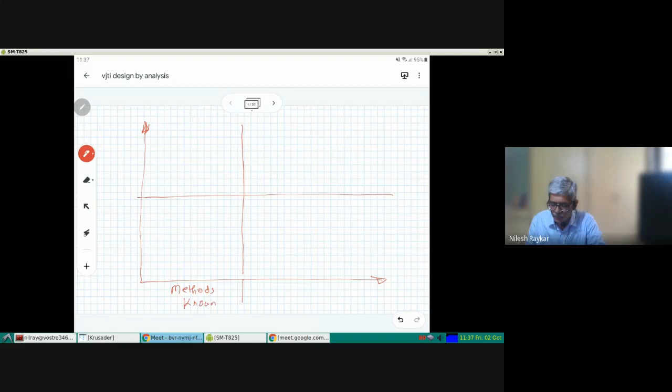So the problems which are there in product design, you can divide into 4 quadrants. Those who have done some work in design thinking would know this particular diagram. On the horizontal axis, there are some problems for which the methods to solve them are known. So methods are known.

And there are some problems in product design where the methods are unknown. We don't know exactly how to design that particular case. On the vertical axis is the customer need, or the output that you are expecting. In the first part, the customer needs are clear. And on the upper part, the customer needs are unclear, so you are not very clear as to what exactly the customer wants or what exactly is expected out of your product.

80% of the problems falls in the quadrant which I will call quadrant 1. This 80% of the problems fall in this realm where the methods are well established, there are design codes, design standards, and the needs are clear. You want the equipment to survive for 20 years. So 80% of the problems will be part of this situation.

There are situations which I'm calling realm 2. In this particular realm, the methods are not known. The codes and standards give you design methods, but these methods have got limitations. So in this case, you resort to what is known as simulation.

So you simulate the problem situation, the environment in which your product is going to work. In this case, I'm talking about pressure vessels - what kind of loading they are going to face. You'll try to see and tackle those problems. The standard methods do not work here.

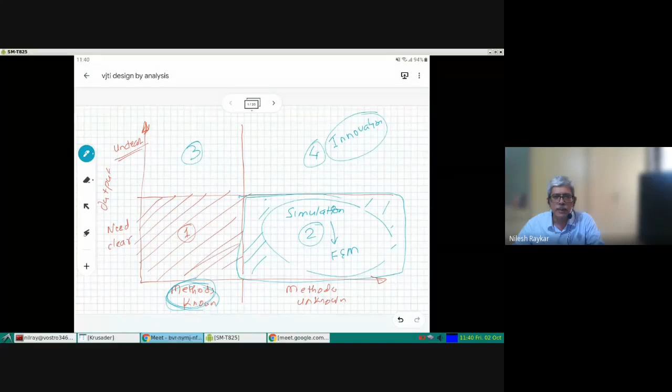Before I start discussing the finite element analysis of process equipment, let me show a brief video which will give an idea of how a process industry looks like - chemical plants, fertilizer plants, petrochemical plants, oil and gas platforms, and so on. There are a lot of industries dealing with process related things. What I'm showing is a YouTube video created by one of the leading EPC members.

We will see in what environment our product is going to work. So when I'm talking about pressure equipment, let's see what a process plant looks like and how it works. I'm just taking you through this video - I'll be skipping some parts which are not relevant here.

So this is a typical view of a fertilizer plant. Have a look at the hundreds of components involved here. When you are talking about pressure equipment, it is not a single component, but a system of various equipment and pipings connected with each other, spread over a very vast area, and this entire system has to work together.

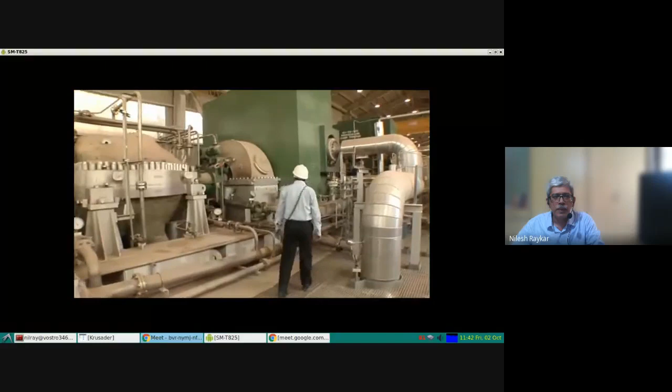We are looking at the various parts of a process plant, and as a product engineer, if your customer is facing a problem, you would visit the plant and look at what exactly is the problem. So the situations we are looking at are as shown here - you'll have equipment which are very huge, and equipment which are very small. Some are working at extremely high pressures, maybe 200 bars.

Some are working at extremely low pressures, in fact in vacuum conditions. So each of this equipment will require different design requirements. When we are designing these products, we are trying to capture the requirement of the customer into our design methods.

From this video, you get a feel of the scale of products we are talking about, and the variety of product customization that is required. Each process plant is unique, and you will require a different approach to customize your design to the needs of that particular customer. We got a feel of what region we are talking about here.

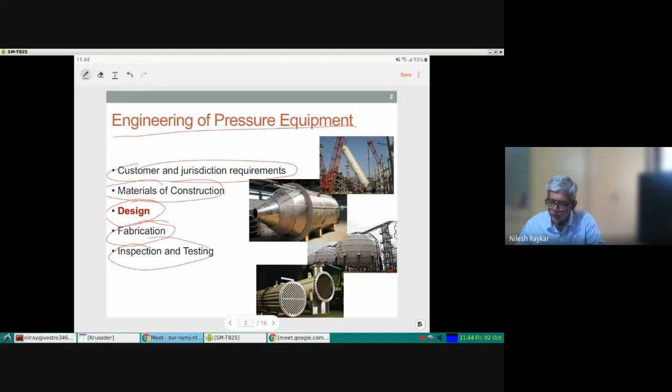There are, as we have seen in the 4-quadrant method, standard methods which are designed by rule, where the methods are known and the output is also known. The design by analysis or design by experimental analysis are the two methods used where the standard techniques are not useful, or cannot be applied because the constraints on those methods will get violated if you start adopting them.

In this case, we are talking about the process plant. We have seen the process plant, its entire system. If one of the equipment fails, it may lead to the full closure of the entire plant and the production that is happening there. So you cannot take any risk in such a product. That is why it becomes very important to have a very clear understanding of what is the problem and how it is to be solved.

And if the method we are using is the finite element method, you must be a master of that method. You cannot apply it half-heartedly without understanding. You cannot just run something in ANSYS, get the output and say that this number is smaller than the other number, so the design is safe. It is not so. You should interpret the results very carefully.

And of course, the procedures are not so unknown. Many of the procedures are very well documented. So although I'm talking about the region where the design methods are unclear, in many parts of the finite element methods, the methods are well established and can be adopted.

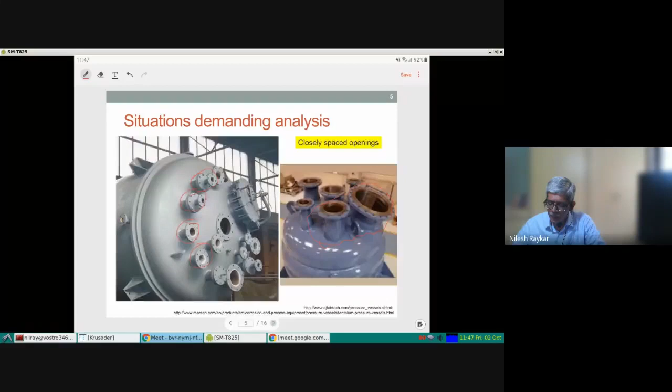The second type of situation is where your geometry is very peculiar. Typically all openings or pipings are circular in shape, but if for some purpose you have an opening which is non-rectangular, non-circular, in which case you require design by analysis. I'm just listing the problems in quadrant 2 which demand finite element analysis for process equipment related products.

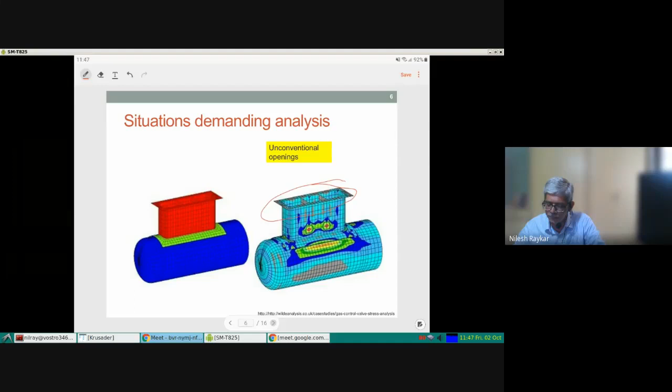Another analysis scenario is that any process plant will have hundreds of heat exchangers. In each heat exchanger, there are two fluids transferring heat, one fluid transferring it to the other for some process requirements. Now, because of this heat transfer which takes place, apart from heat transfer, as a mechanical engineer, it introduces a lot of temperature gradients in your equipment. So in addition to pressure loading, you also have thermal stresses which get induced, which need to be tackled.

To some extent, the design by rule methods are able to handle this, but in very critical equipment, one resorts to the finite element method - for most of the time, either to confirm your design by rule results or to have a double assurance that this particular thing is going to work.

In certain cases, the equipment contains complicated items known as internal items for process requirements. These internal items are usually designed by the supplier of these internals. But in some cases, since they are integrated with your pressure boundary, you need to know the effect of the performance of these internals on your equipment. So that is also another scenario where finite element method would be used.

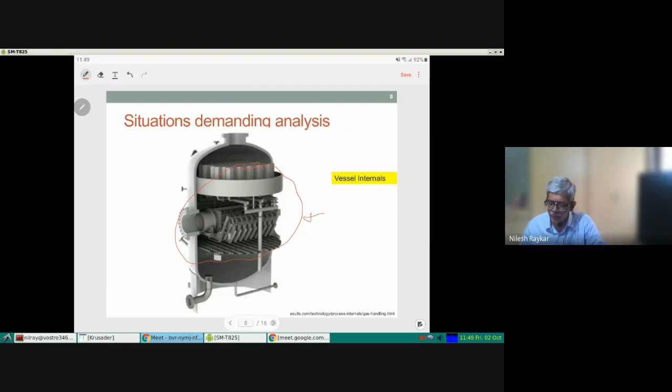Another very important, quadrant 3 type of problem, is that in process equipment there are a lot of bolted joints - bolted joints which have a sealing member. This sealing member is known as a gasket, which does the sealing. The internal pressure acting on the inside is sealed because of the gasket, which is getting compressed by a number of bolts provided on the periphery of the flange.

A customer would always expect the product to have properly designed, leak-tight joints. Unfortunately, for certain high pressure joints, there are no well-established methods to design such joints, so we use finite element methods to get more confidence. However, in my experience, these methods give a higher degree of confidence, but I cannot assure it will solve the customer's problem. This falls in quadrant 3, where customer needs may or may not be satisfied even with whatever design tools you use, but finite element analysis is often used in such scenarios.

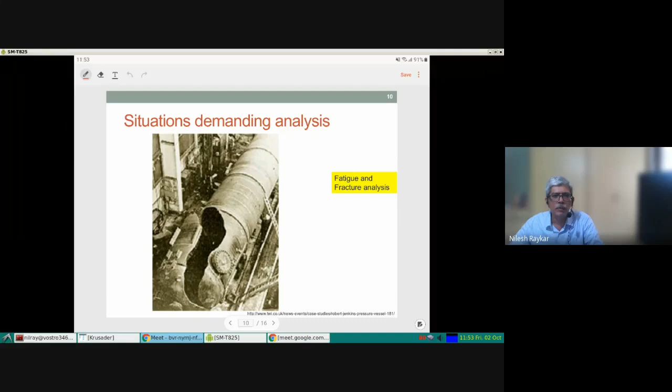Before we do that, we'll understand the nature of materials involved in this equipment, because when doing a simulation, the modeling of material is an important factor. So for these products, what kind of material models are required, that we should be clear about—we'll look at that briefly. Secondly, we need to know what kind of loadings come on this equipment. When simulating, the application of loads, which in finite element method you must have come across by now, are the boundary conditions—displacement boundary conditions, mechanical load boundary conditions, or thermal boundary conditions. So what kind of loading appears on this pressure equipment? We will see. Let's begin with the materials.

There are different material models. In the earlier era, about 20 years back, when computational resources were costly, one used what is known as the linear elastic or perfectly elastic model. In this model, the horizontal axis is strain, vertical axis is stress, and we assume the material has infinite load carrying capacity with stress permanently proportionate to strain. This model, from a finite element point of view, is simple because there is no material-related nonlinearity. As soon as you bring any nonlinearity into a finite element solution, the requirement of computational resources multiplies manifold. So with limited computational resources, you would try to use as simple a model as possible, which is why many finite element analyses for process equipment are based on the perfectly elastic model.

However, in the current scenario, there is such a huge increase in computational capacity that one can easily use other models which were scarcely used earlier. The next model, when you want to introduce plasticity of the material, is known as the elastic-perfectly-plastic material. In this case, up to the yield point, this model has, in addition to the modulus of elasticity, one more parameter: the yield strength. So this model has two parameters to fully define it. It assumes that after the yield point is reached, the material becomes perfectly plastic—meaning any amount of load applied beyond that, the stress will not increase, only the material will start permanently elongating for an infinite distance.

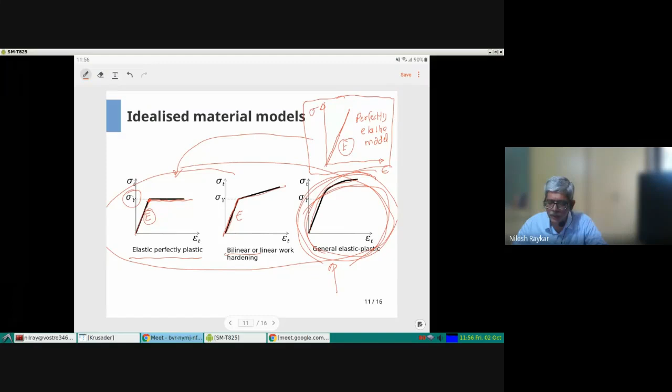Okay, so this is regarding the material models. Next, we have to deal with how to establish the failure criteria. So you have defined your material. Now you have to define when that material will fail. So that is known as establishing your failure theory. There are different failure theories which are available.

The essential common point behind all these failure theories is that through the finite element analysis, you are getting your stress tensor, which has got 6 components. You want to connect it to a tensile test, which gives you only a single value.

So the tensile test gives you only sigma y, whereas your stress analysis at every point will give you sigma x, sigma y, sigma z, and the remaining stress components are there. So how do we combine when the failure will occur, when the material will start yielding? Is it that when sigma x reaches sigma y, or when sigma y reaches yield strength, or when addition of the two reaches yield strength? So that is the question.

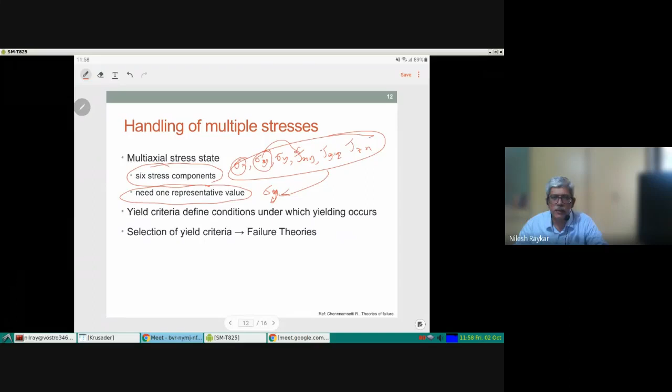So it has long been solved. We as a mechanical engineer know that there are different theories of failure which essentially define for the process equipment, the design is based on yielding criteria. So you don't allow the material to have any permanent deformation in any of the components of pressure equipment. So the yield criteria needs to be defined for your analysis. Before you proceed, you must establish what is the failure theory that you are going to use.

There are different number of failure theories available. For example, the oldest one is the Rankine theory, or the maximum principal stress theory, where you say that whenever your principal stress reaches yield strength, the material will fail. Then you have maximum shear stress theory, which says that when the shear stress at a particular point reaches a certain value, then the material will fail, and so on. So there are different failure theories available.

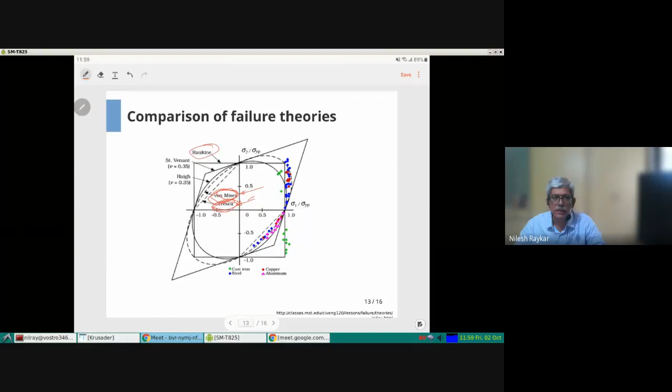Out of which, in pressure vessel equipment, you use either von Mises theory or Tresca theory. Von Mises is based on the energy principle, and Tresca is based on maximum shear stress principle. So if you look at the design codes, here I'm talking about the most popular international code.

This code is given by the American Society of Mechanical Engineers. They have the boiler and pressure vessel code, which is extensively used. Almost 80% of the equipment all over the world would have been designed as per the ASME codes. With the introduction of European codes, the ratio would have changed a little, but throughout this session, I'm taking this ASME code as a reference for explaining the concepts behind the finite element method as applied to pressure equipment.

If you look at the different ASME codes, the two codes relevant to pressure equipment are: one is ASME Section 8 Division 2, which is used for more critical equipment. This particular code currently uses von Mises theory. A few years back, before 2007, they were using maximum shear stress theory.

The von Mises theory is more accurate. It gives more economical design as compared to the maximum shear stress theory, and they shifted to use the new failure theory. The other code, which is used for routine type of designs, still uses the maximum principal stress theory. Okay, so we have seen material models, we have seen the failure theory.

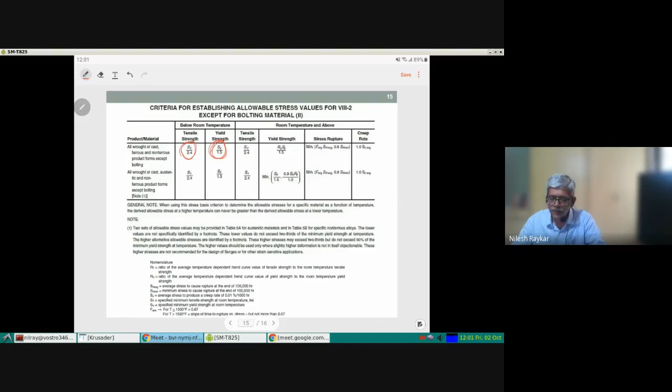The factor of safety which are used in the code, I just want to touch upon that. You have a factor of safety of 2.4 on ultimate tensile strength and 1.5 on yield strength. That is the level of factor of safety usually followed in these design codes. When you apply the theory of failure, you get the yield criteria. You apply the margin of 1.5 on the yield strength, so you don't go up to yield strength, you go up to 2/3 of the yield strength.

Before we look into different types of analysis, we will look at the different loadings which appear on the pressure equipment. There are certain loadings which are normal or continuously operating, such as the internal and external pressure, the dead weight of the various components, and the contents of the vessel. The vessel may have some fluid or oil or catalyst which will exert load on the vessel.

You are connecting the vessel with different types of piping, and these pipings will exert some load on your equipment because of expansion and contraction. You have vessel supports, and different vessels are supported at different levels using different types of supports. These supports, at their location, cause local loading on the pressure equipment, which needs to be considered. In many equipment, especially reactors and heat exchangers, there are temperature gradients, so thermal loads need to be considered.

Apart from these continuously acting loads, there are loads such as wind, seismic, and snow, which are climatic loads that come and go. There are also very occasional loads, such as during erection and transportation of the equipment, which may happen only once in the lifetime of the equipment. If you are transporting a vessel by ship, during sea transport there are jolts which occur on the equipment, and these also need to be considered by the designer. Then during testing of the vessel, or during startup and shutdown, there can be abnormal load conditions which need to be considered.

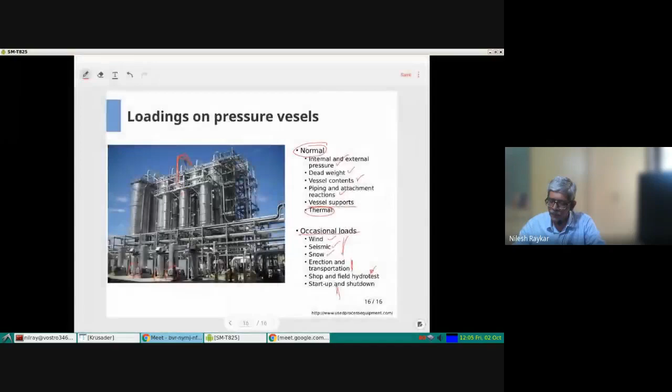Okay, having seen that, let's move ahead as to how the standard design codes or established design methods define the finite element analysis for this kind of equipment. Let's look at the next part, where we look at what must be analyzed for pressure equipment.

When you are designing pressure equipment, there are design codes involved, because we are dealing with equipment. We have seen initially the fertilizer plant, which spans so much area, and the output measures in terms of some thousands of tons per day. There is a huge amount of process fluids involved, and any leakage or problem in any of the equipment is highly risky for humans as well as the environment. Hence, each country has its own national code, including India, which has codes for the design of this equipment. These are known as the design codes.

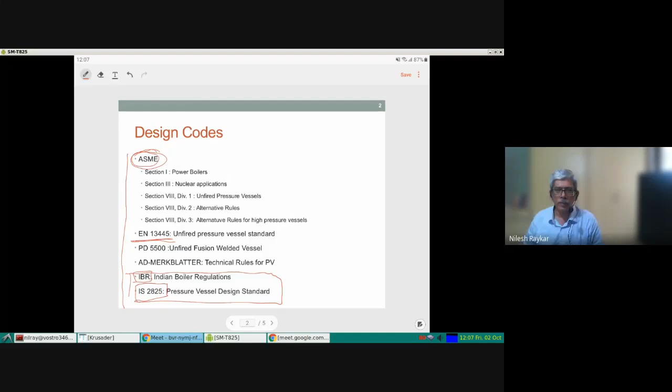Apart from that, for India, for any steam service, you have to use what is known as the Indian Boiler Regulations, which is a mandatory requirement. For pressure vessels, we have IS 2825. However, IS 2825 allows use of known or established international codes, which includes ASME. So all my further discussion will be with respect to ASME codes, but any international code has a similar design philosophy. Whatever concepts we talk about, although taken from the ASME code, you can safely assume they are equally applicable to the European code, Australian code, or New Zealand code.

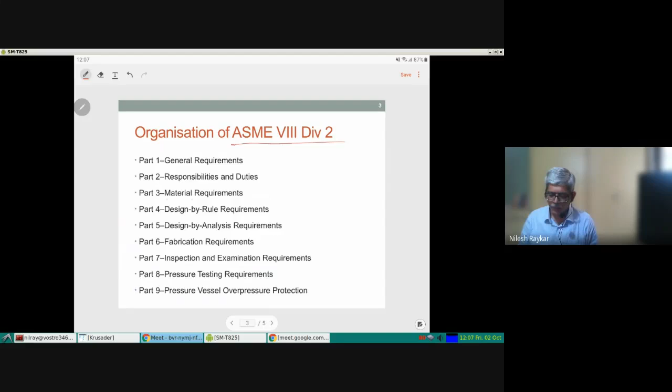So the title of this particular session is design by analysis of pressure equipment. That word has come from part 5 of ASME section 8 division 2. All our further discussion is with respect to this chapter, which spans about 100 pages or less in ASME section 8 division 2.

These pages give a lot of instructions as to how to carry out the product design, in this case pressure equipment design, by using finite element analysis. Obviously finite element analysis can be done using various commercial softwares, though they cannot give instructions as to how to do it as per a certain software.

These are general guidelines, and we will have a look at these general guidelines briefly before we proceed.

If you look at the contents of the design by analysis, or DBA route, you will find different requirements: a requirement for plastic collapse, a requirement for local failure, a requirement to be safe against buckling, a requirement to be safe against cyclic loading, and requirements for certain components such as bolts, perforated plates which appear in heat exchangers as tube sheets.

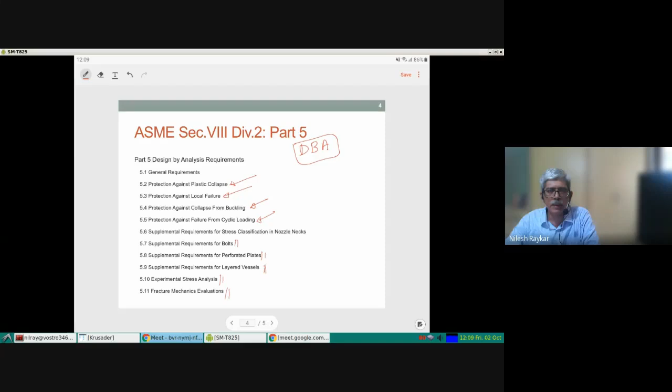design theories that we as mechanical engineers have learned, and how to implement these theories for a certain type of product. In this case, for boilers and pressure vessels, how to implement these theories using a numerical method - in this case finite element method - as explained in this particular code.

So what is given in the code is not actually how to do step-by-step finite element analysis, but they give which material model to use, what assumptions regarding the loading you can make, what assumptions regarding geometry you can make.

When you are combining different load cases, how to do this combination, what criteria to be used for different types of loads - these are the things which are given by this design code.

I have summarized in the next slide an overview of all the methods covered by this design by analysis chapter of ASME section 8 division 2. Any international code will have a similar structure, only the names would be different.

Essentially, we are looking at 4 modes of failure which are highlighted by yellow in this particular case. I'll just show them.

The first mode of failure is known as plastic collapse. In this mode, what you are establishing is that your vessel will not break open - it will not rupture under the action of loading, or undergo full plastic deformation under the action of loading. That is the meaning of plastic collapse in this context.

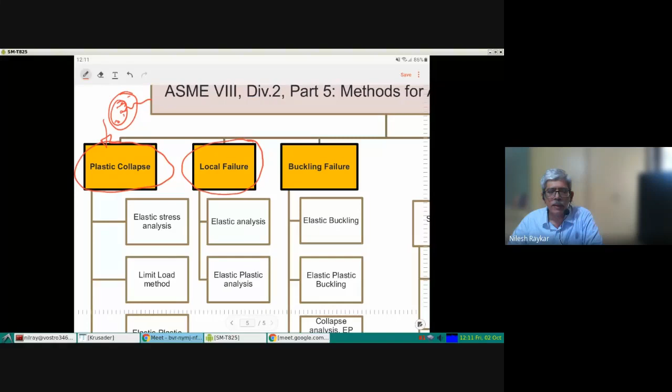The next is local failure. Whereas plastic collapse is a general failure - if you have a cylinder subjected to internal pressure, the entire wall is breaking, which is what we learned in strength of materials as hoop stress. When the hoop stress reaches yield strength, the vessel will start uncontrollably yielding, or permanently deform. That is what is checked by plastic collapse.

Whereas local failure is something localized. The design philosophy of pressure equipment is to not keep all stresses below the yield strength - if you have that impression, that is wrong. In certain regions of pressure equipment, the stresses do cross yield strength. If you want to design something where no stresses reach yield strength, it would be an extremely costly design, almost double the cost of what we are designing now. So you have to allow certain regions to cross the yield strength.

When you do that, some plastic strains, permanent strains, get stored in the material. These strains, if they cross a certain value, will lead to the formation of cracks if the loading is repeated, and will lead to failure. So the second criteria looks at this particular case. The first one is more based on stress, and the second is more based on strain, the strain behavior of the material.

The third criteria is related to stability. The first two took care of mechanical failure in terms of total breakage, permanent deformation, or local origination of crack. The third failure looks at stability. This happens whenever any part of your pressure vessel is subjected to substantial compressive load.

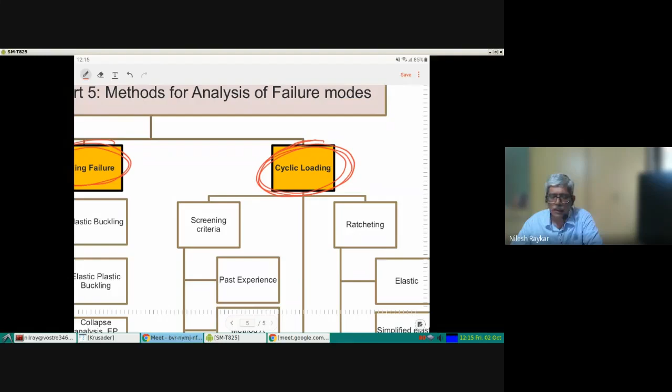So if nothing else, the startup and shutdown will cause that many load cycles for the equipment. When the plant is shut down there is no load, and when operating the equipment has full load. So cyclic loading needs to be checked for all equipment. There are some exemptions where you need not do the cyclic or fatigue analysis, but in most situations you need to do that.

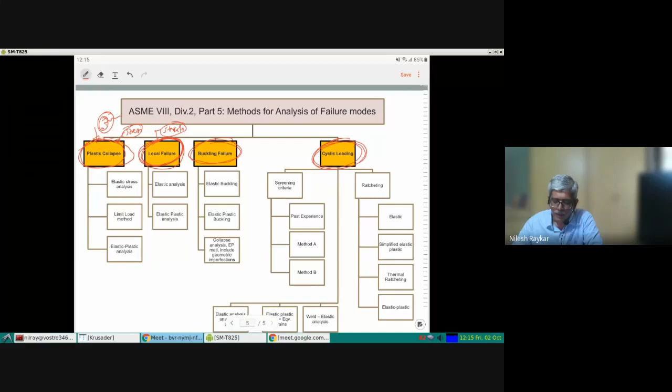Having seen the four top modes of failure that the design by analysis approach of pressure equipment calls for, under each case, for example for plastic collapse, you will find alternative approaches given by the code. You have elastic stress analysis, which uses the perfectly elastic model. The limit load analysis uses the elastic perfectly plastic model. Depending on the material model, this elastic plastic model uses either bilinear or the generalized elastic plastic model.

So obviously the choice between these methods depends on how fast and how accurate you want the results. If you want the most accurate results, this would be preferred, but in that case you need more computational resources. Excuse me, let me have water.

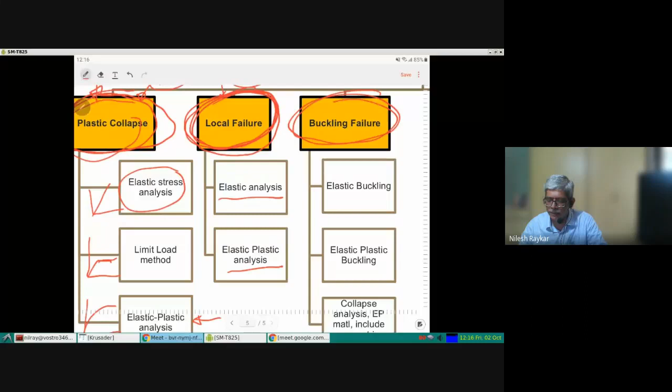Similarly, for the local failure approach, you will find there is elastic analysis which uses the perfectly elastic model, or elastic plastic analysis. In buckling analysis, again you can use elastic model, elastic plastic model, or something where, in the case of buckling analysis which we'll see later, the failure can occur not only because of material behavior but also because of geometric imperfections.

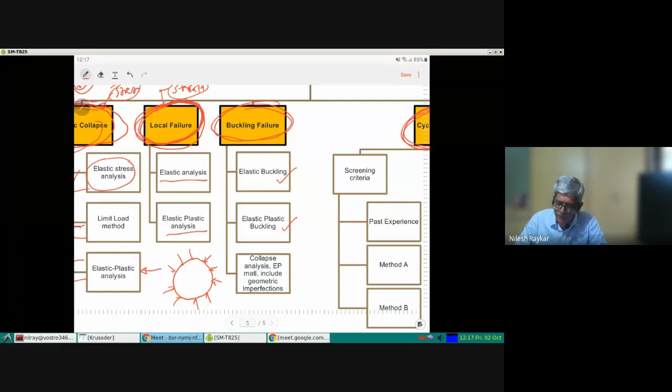So if you consider a perfect circle and subject it to external pressure, you will find that the buckling pressure, or the pressure at which this cylinder collapses or buckles, is higher than if this cylinder has some ovality. For example, when manufacturing these cylinders, it is impossible to get a perfect circle. I'm exaggerating here, but if your cylinder has some ovality, the buckling pressure for this oval cylinder is much lower than that for the perfect circle.

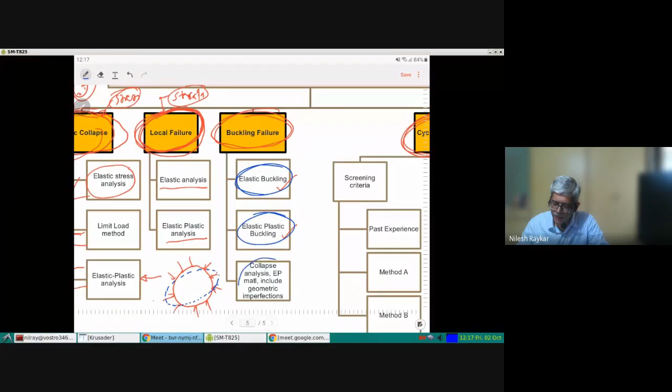So when doing theoretical analysis, you are modeling the equipment as geometrically correct parts and then finding out the buckling pressure. Whereas in the last part, you are allowed to use the exact geometry, meaning you take measurements from your actual manufactured product and then start operating on that. So that is the last approach under buckling.

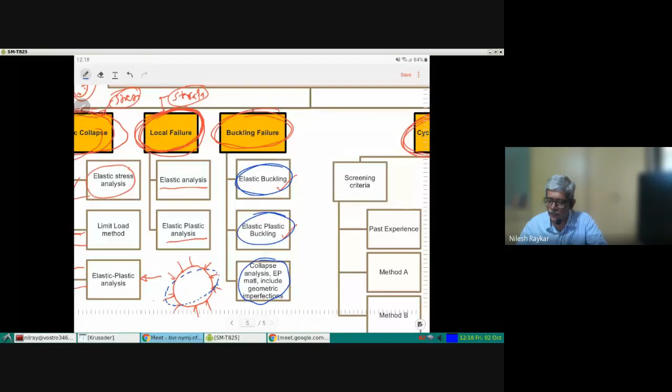Under cyclic loading, the screening criteria is something which allows you to exempt from analysis requirements. The exemption can be based on past experience. Some equipment has worked for 20 years, and if you are redesigning similar equipment, 'similar' is an important word, and what is similar is explained in this part of the standard. Then you can exempt it, and there are some more elaborate methods which we need not go into in detail.

If the screening criteria is not met, that means if your equipment requires fatigue analysis, then there are different methods for fatigue analysis given, which are again based on what material model you are using—elastic analysis or elastic-plastic analysis.

For welds, whenever you are having fatigue analysis, stress concentration plays an important role. In welds, due to the means of manufacturing, it cannot be as perfect as machine components. So you always have some kind of surface finish. You can do some grinding to give them a good polish, but still they will have some non-homogeneity in terms of material, as well as in terms of their geometry—they are not perfect. So there is a special section for the analysis of welds, which is also provided.

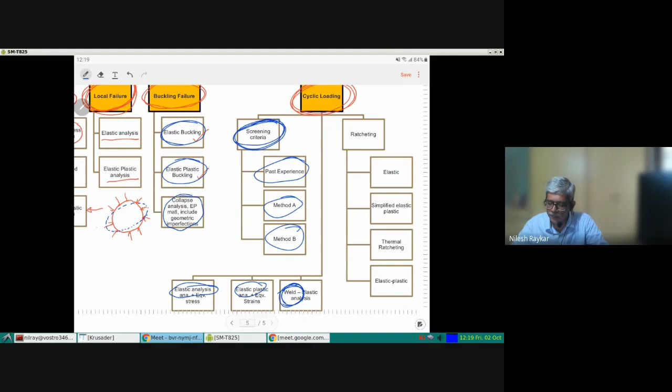And then finally, there is ratcheting. That is, if you are repeatedly applying and removing the loading and unloading on a particular component, and the component is going into the plastic zone, there is some permanent deformation. Over the time period, in ratcheting failure, that permanent deformation keeps growing uncontrollably, and at one point of time your component fails. So how to avoid this ratcheting is another part which needs to be seen.

This figure gives you a bird's eye view as to the different finite element analyses that need to be done on pressure equipment. They fall under 4 main branches: one related to total collapse, another related to local failure, third related to instability, and fourth related to fatigue.

In the remaining time, we now have about 30 minutes. So in the remaining half an hour, we will look at these 4 parts one by one.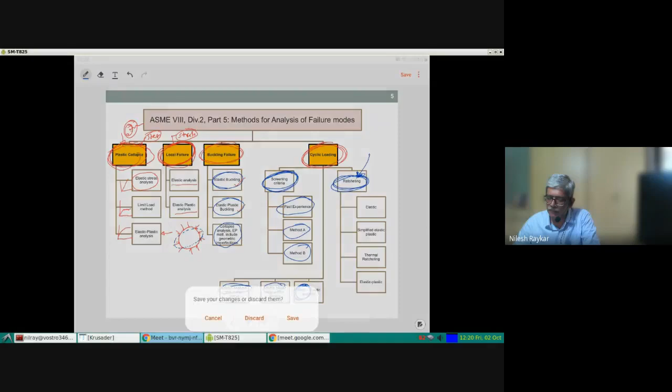We are looking at the first leg, which is plastic collapse. As I said earlier, there are 3 methods. We are currently looking into the case where you are using a linear elastic model, so we are not considering any plastic deformation—our model is elastic only.

This is the oldest method. All the methods based on the elastic model are the conventional or classical methods, established long back, around when the code came into the picture in the 1940s. So these particular methods are from that point of view. They are very well-established, widely used, and very experienced people are there who can comment and scrutinize the results obtained from them. That is the advantage.

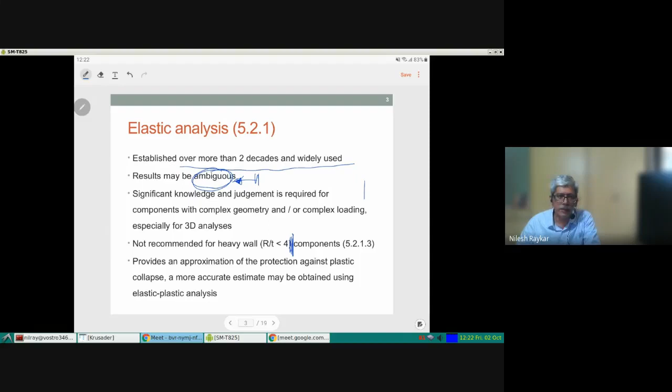However, these results from the elastic model, since you are not actually modeling the yielding, you have to predict when the yielding will occur. That prediction is done with some guidelines, and those guidelines can be ambiguous, at least for a new person. That is the main disadvantage. Apart from that, they are not recommended for very thick vessels, where the diameter-to-thickness ratio is less than 8.

The key concept in the case of elastic analysis is in terms of what is known as categorization. Let's understand this categorization in more detail.

This gives you an idea as to when you are using finite element method for a certain class of products, the finite element program may give you output in a certain fashion, typically in the sense of displacement—3 components of displacement and 6 components of stress at every point. Now these results need to be collated, combined, and then modified in order to interpret them. I'm explaining this in detail to give you an idea about what kind of processing a finite element analyst needs to do for different products. For different industries and different products, this method differs. Essentially, your output from any finite element model will be in terms of components of stress, strains, and displacements. How to interpret them depends on what is your product and what is your standard. So what I'm explaining is from a pressure equipment design point of view.

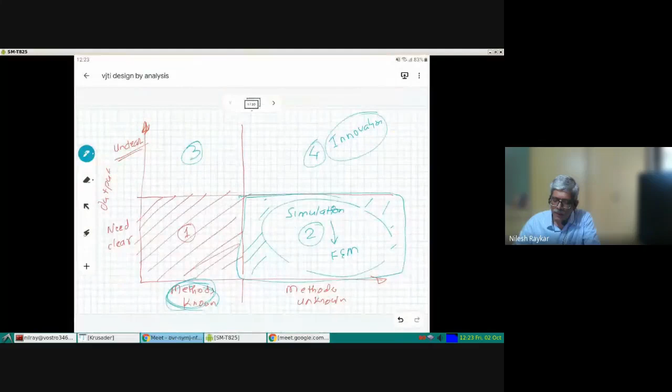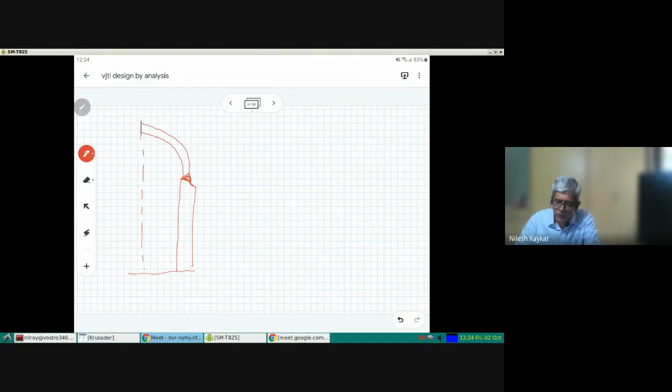So let's look at what this categorization is about. Let me first draw a part of a pressure boundary. I'm considering a cylindrical vessel, where the bottom part is a cylinder joined to an end cap which is spherical in shape. Let's call this another part. So these are the pressure components.

If you have to decide how much should be the thickness of this cylinder, the design by formula gives you the thickness. It is governed by PD by 2T equal to sigma. For sphere, it is PD by 4T equal to sigma. If you maintain the stresses with appropriate factor of safety, you get the thickness of this component, and thickness of the other component can be obtained.

Now, where finite element analysis comes into picture is where you are joining these components with each other, the weld joint. You see I have drawn a kind of taper at this particular point. Since these two components are having different thicknesses, because the stress levels in sphere are smaller for the same diameter and pressure, you can afford to give smaller thickness for the head. From cost point of view, you would give that smaller thickness.

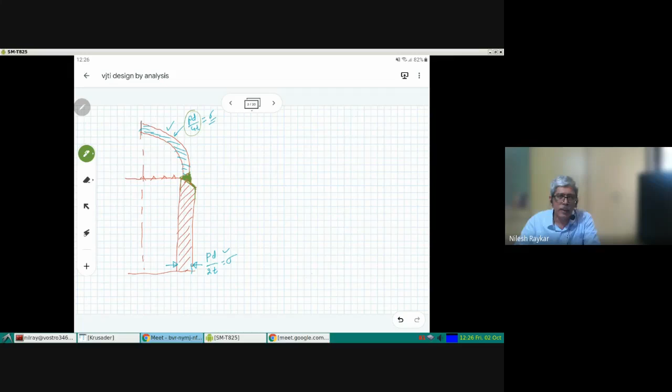When you give these different thicknesses, you are joining two parts having different stiffnesses to each other. When the same load in terms of pressure is applied, the sphere tries to expand by some amount and the cylinder tries to expand by another amount. As a result, there is a discontinuity at this particular point and a localized bending which causes a distribution of stresses that cannot be established by standard methods. It can be done analytically. For this simple case, analytical solutions do exist.

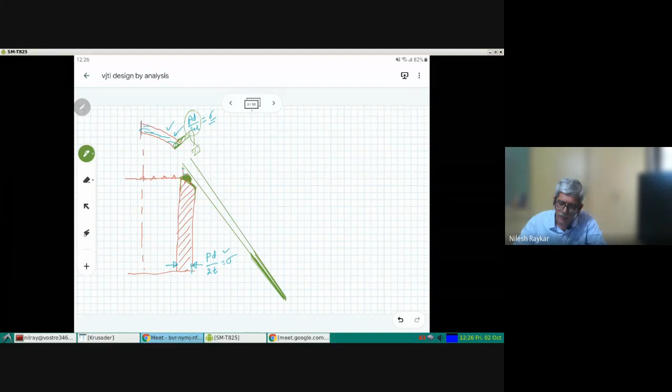But in general, you resort to finite element method because, in addition, this particular head may have some kind of pipe attached to it. Because you are making an opening in this head for a nozzle, you will have a kind of discontinuity which appears there, which needs to be taken care of. So in such a case, we need to do finite element analysis.

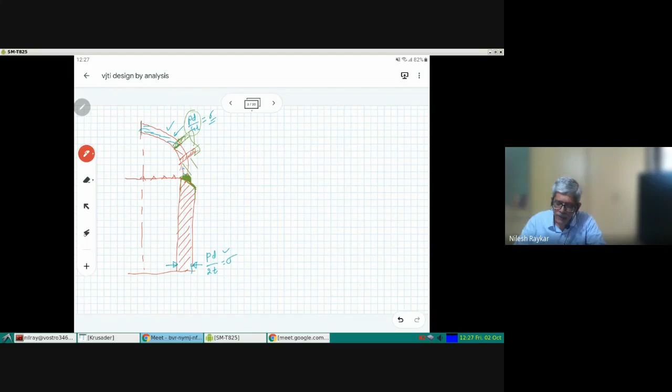Having understood the finite element analysis, let's go back to the original purpose: what is categorization of stresses and why it is required. Now the stresses which appear at this weld region are unknown, so they need to be established. So that is one thing that we have obtained. Now the categorization is done based on three criteria.

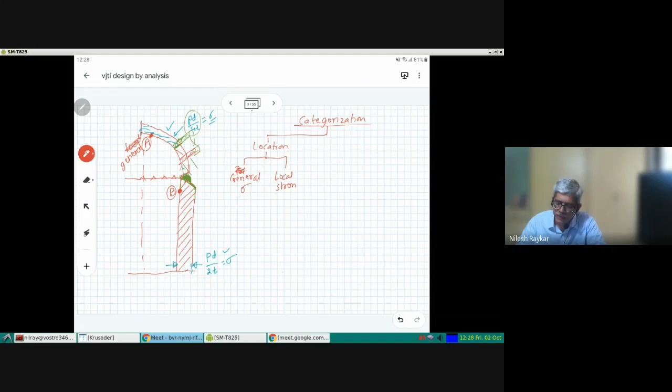The first criteria is based on the location. So based on location, you have general stresses and you have local stresses. The stresses which are appearing away from this discontinuity, away from this green region drawn here — the stress at point A would be called general stress, and the stress very near to this discontinuity, at point B, would be local. So the stress at A is general, at B it is local. That is one level of categorization.

The second level of categorization is in terms of the origin of the stress, why that stress has come. Based on that, there are primary loading stresses and secondary loading stresses. In this case, this stress might have occurred because of internal pressure. If so, the stresses at B would be called primary stresses. Primary stresses are like pressure stress or dead weight of the equipment, any mechanical load which keeps on increasing the stress as the load increases. So they are known as non-self-limiting stresses, for example stresses because of pressure — as you start increasing it, if you double the pressure, the stress will double at point B and everywhere. So that is known as primary stress.

And the secondary stresses are essentially those governed by displacement or strains. A typical example of that is thermal stresses. These stresses are self-limiting, in the sense they do not keep on growing infinitely. So these are known as self-limiting stresses, or self-limiting category of stress.

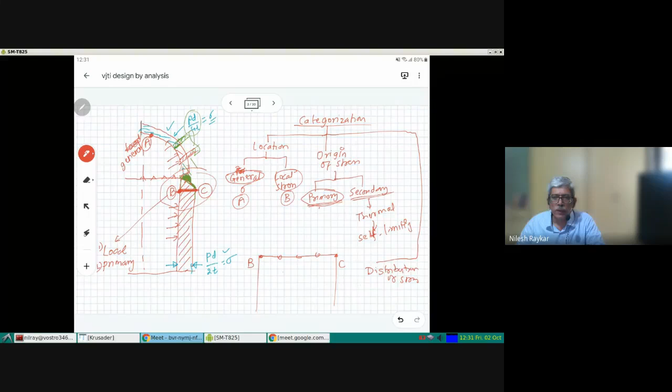And C is there. If I plot the distribution of stresses, at B there are 6 stress components, at C there are 6 stress components, and at every node in the finite element, there will be different stresses. So if I plot one stress component, for example sigma x, from B to C, how it varies, you will find the variation may be something like this.

So we are assuming that this distribution is sigma x is so much at point B, and it is, let's say, up to this magnitude at point C. And based on this distribution, we further categorize the stresses at the point.

Now, instead of calling it at point B, we define it as a section BC. So the distribution of stresses is always across some section. The distribution cannot be at one particular point. So for calculating this component, we have to define some section passing through that point and then define those components.

This particular distribution, you can simply imagine to be made up of a polynomial, so sigma x can be assumed as some constant term a plus bx plus cx square, plus all the higher order terms, which I am clubbing together. The first term, which is constant, is nothing but the average stress acting on this particular component.

Because of this stress distribution, if it is tensile, and you add up all these forces, you will get the net force acting on this section. If you divide by the area of this section, you will get the average stress component. This is known as the first component, called the membrane stress.

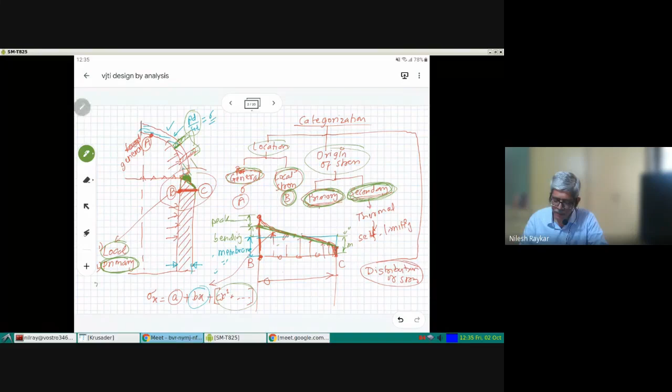So at our point B, because it is subjected to stresses from internal pressure, the stresses are primary. Lastly, based on distribution, you can have the third categorization as membrane, bending, and peak. The peak stresses are used for fatigue analysis, and membrane and bending are used for plastic collapse analysis.

So what we are talking about here is the first branch of our analysis - plastic collapse. We are doing plastic collapse by elastic analysis. When you do elastic analysis, after completing your finite element analysis, at every critical point you want to investigate, you have to categorize the stresses in terms of whether it is general or local, primary or secondary, and then based on the distribution and the section you think is critical, you will do the categorization into membrane, bending, and peak.

Once you have finished this, you are ready to check whether each category is satisfied. This is offered by what is known as the ASME Hopper diagram. ASME doesn't actually call it that; it's just the popularly known term. This is what figure 5.15 of the ASME would look like.

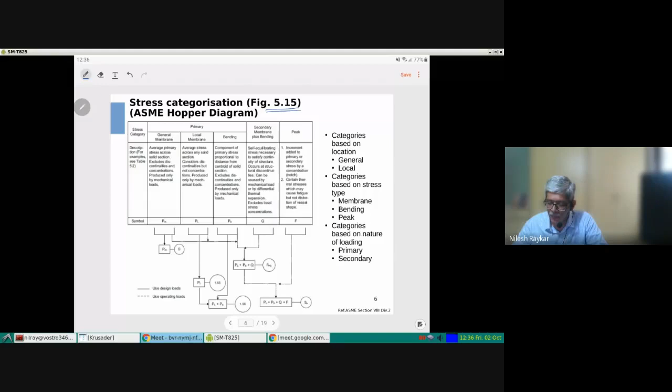Here you can see the stress category, defined as primary and secondary, which is based on the origin of the stress. Then you have general and local, which is based on the location. And then you have membrane and bending, which are based on the distribution of the stress at that particular point.

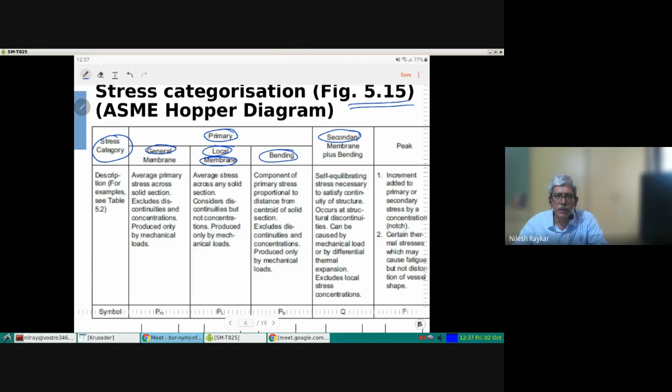Depending on which category you are checking, there are different limits. For primary membrane, the allowable stress is S. If it is primary local, the allowable stress is 1.5 times S. This S is the allowable stress from the first part, which is yield divided by, involving some factors, but for simplicity let's assume it is 2/3 of the yield. So for primary membrane, you limit it to 2/3 of yield. For local membrane, it is 1.5 times S, so 1.5 times S becomes the yield strength, meaning you are allowing it to go up to yield strength.

If it involves secondary stresses, you use what is known as SPS, which is approximately equal to twice the yield strength. So if your stresses originate from secondary loads, which are self-limiting, you allow the stress levels to go as high as twice the yield of that material. That is the gist of this elastic analysis approach.

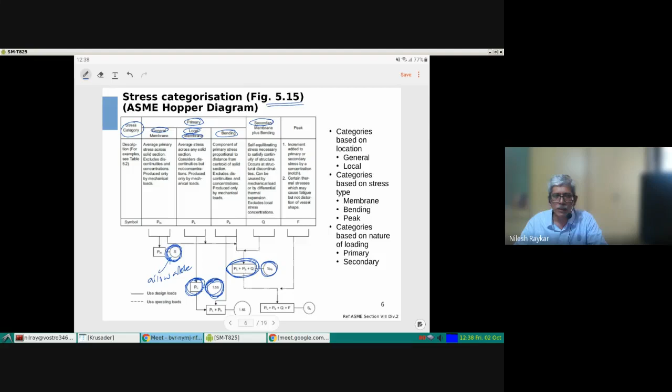Let me illustrate it with an actual analysis example. Here I have considered a nozzle. A nozzle is nothing but a forging, a cylinder attached to the main vessel. That is, your main vessel is a cylinder and you are piercing it with another cylinder having a certain shape, given for a certain region. The loading we are considering is only internal pressure loading.

Apart from that, there is no other loading. So only for internal pressure, we have to analyze what will happen to the stresses in this region. The steps involved: first you open your finite element software, define your material model, define your geometry, give boundary conditions in terms of displacements, and boundary conditions in terms of loading. In this case, the loading is pressure. Then you do the analysis, get the stresses, categorize them the way I explained, and interpret whether it is safe or not.

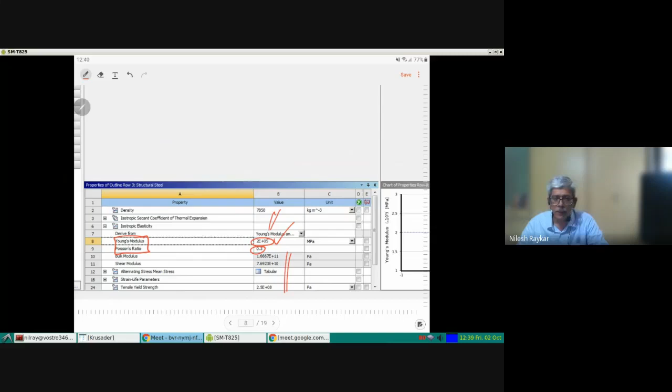Let's see pictorially how this is done. The first step is to define your material model. This is the screen from ANSYS. You need to define the Young's modulus and Poisson's ratio for your material. For this perfectly elastic model, you only require the E value to fully define it; other things are not required, but ANSYS will take them by default, so that's what we're using here.

We know that in the region where one cylinder joins the other cylinder, we are expecting high stresses, so there the quality of mesh should be good. It could be bad at other points, but not at this point.

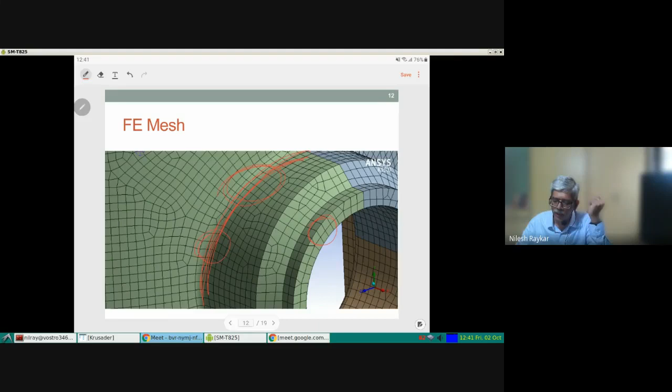Next you have to give the boundary conditions and loading. In this case, I fix the bottom of this cylinder only in the vertical direction—fixity is there. It should be allowed to expand radially; I will not go into details of that. Then internal pressure is applied on the inner surface.

Wherever you are cutting this nozzle, you have to apply the longitudinal stress which exists here, because this nozzle is still a pressure component and there is some piping which continues from there. So when cutting this nozzle at this point, there is actually a longitudinal stress acting, and you have to simulate that in your model. Similarly, at the top end of the cylinder, the longitudinal stress needs to be captured.

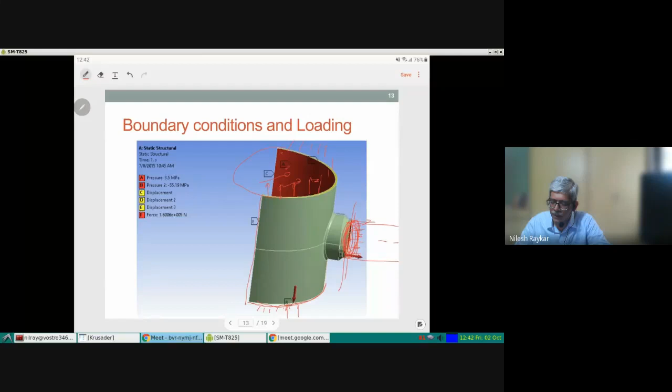You see that I have not modeled the full cylinder—I have just modeled half the cylinder. This is done to conserve computational resources and make the model small, known as taking advantage of symmetry. Although our model does not have two symmetric nozzles, we are not interested in what happens at the backside of this model. So we are just taking a smaller model, with the idea to reduce computational time as well as computational resources.

Okay, so this is another view of the boundary conditions.

Then you obtain the von Mises plot. As I said earlier, these von Mises plots by themselves are not useful for interpreting whether the case is okay or not—we have to first categorize the stresses. This gives you the first idea as to whether the behavior of the model is correct or not.

Two things you have to see: one is what is the deformation of your model. Any finite element analyst would know the importance of observing the deformation—it gives us the first clue as to whether the loading is applied properly or not. So if you find that after application of the load, the material is having inward deformation, that means the stress is not there.

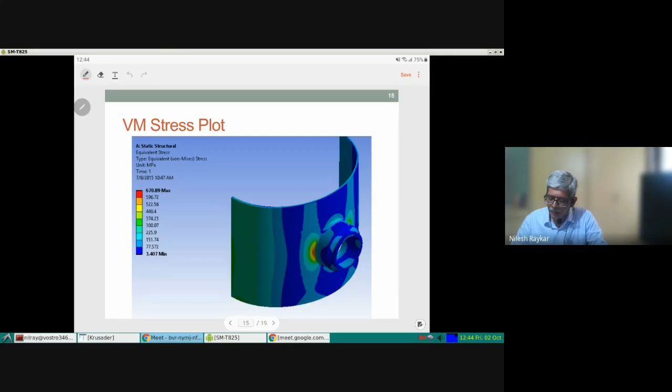In which case you will have to change the stress levels, in which you have to check the boundary conditions and change them. So observing the deformation and the stress pattern is important to check whether there is some obvious mistake in loading or boundary conditions.

Once you have satisfied yourself, you will go into the categorization of the stresses in terms of primary or secondary. They can be decided offhand because we know it is a pressure, so it is a primary stress category. And since we are analyzing a location near the nozzle, near the discontinuity, it is a local stress.

So we know it is a primary local stress, but for establishing membrane, bending and the peak stress, we have to do what is known as linearization of the stresses. The term linearization is coined by the code as well as adopted by ANSYS. This particular ANSYS is used extensively for pressure equipment design, so ANSYS has included ASME criteria into its software itself.

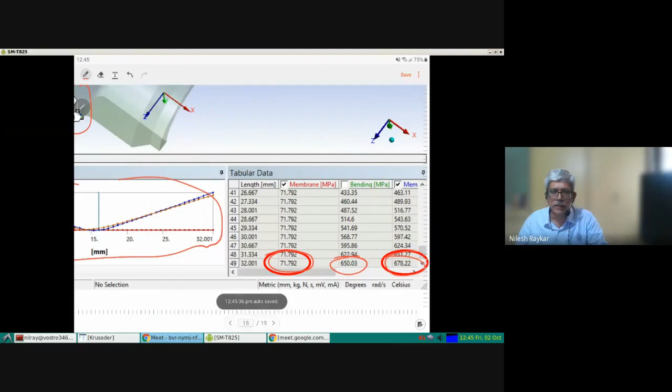So you have the criteria for linearizing the stresses. For that, in order to calculate the linearized stresses, you need to have a section—you need to define a section. Once you have defined the section, at that particular section you will get the distribution of the stresses as I explained earlier. So we'll get the membrane stresses, the bending stresses, and the membrane plus bending plus peak stresses. For each of them, there is a different limit defined by the Hopper diagram, which we need to take care of.

Okay, so this gives you an idea as to how one performs the plastic collapse check, the first branch of the check that one needs to do. Now let's proceed—if you are using, instead of an elastic model, an elastic-plastic model or elastic perfectly plastic model, the checks are a little different. We will not look into that. This is one very popular method which we have seen.

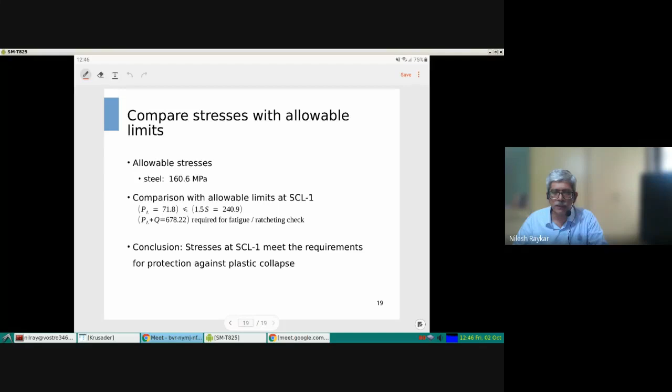Now let's look at the second branch of failure, that is local failure. From plastic collapse, we have seen elastic stress analysis. Now let's look at the second branch, local failure, again using elastic analysis. Essentially, the local analysis checks for local plastic strain levels. You have to actually do strain analysis to do this completely, and that strain analysis part is covered in the second part.

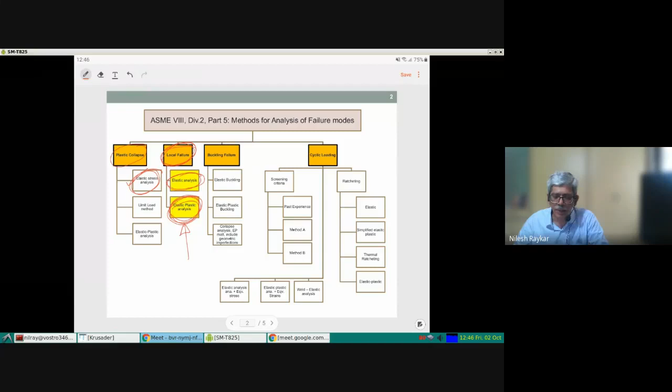However, a much simpler method is also offered by this standard, known as local failure using elastic analysis. In this case, subject to certain conditions, the local failure criteria is met if the addition of all the principal stresses is less than 4 times allowable stress. This allowable stress you can consider as 2/3 of yield strength. So if your summation of principal stress at every point is less than 4 times 2/3 of yield, then the standard prescribes that this local failure criteria is met. If you meet this criteria, there is no chance that the plastic strains will grow into formation of cracks. That is the simplest approach.

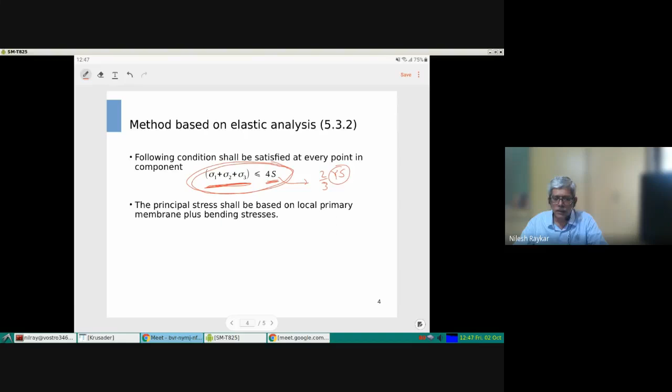So this simple method is available only for certain cases. For remaining cases, you have to do detailed strain analysis, which we are not looking into at this particular point. So the second part got finished extremely quickly as compared to the first one, which we discussed very extensively.

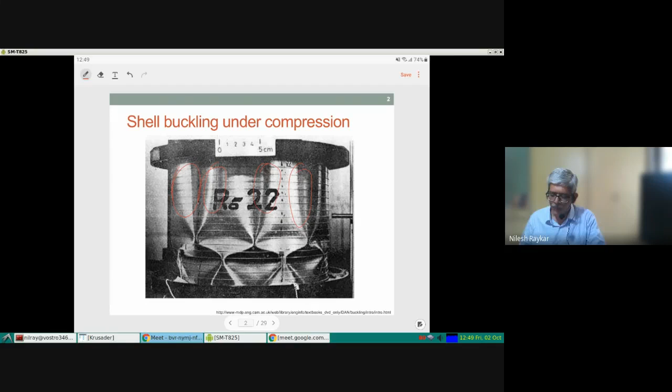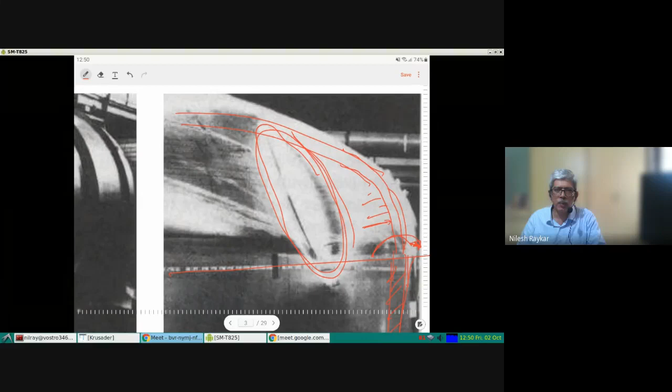Buckling may not occur only because of external pressure—interestingly, it happens because of internal pressure as well. So you have one particular head joined to another cylindrical component: this is a cylindrical component, and this is an elliptical component, instead of a sphere it's an ellipse. When internal pressure is acting, remember that this buckling you are seeing in this particular view has occurred under internal pressure—it is not external pressure that has buckled this cylinder. Because of internal pressure, we discussed that due to discontinuity there will be some local bending at this particular point, and this bending causes compressive stresses on the outside. This compressive stress is what has caused the buckling of this cylinder. So the point to remember is that for components, specifically very thin components, under internal pressure also you can have a buckling failure. Buckling is to be checked wherever the compressive stress distribution is very high.

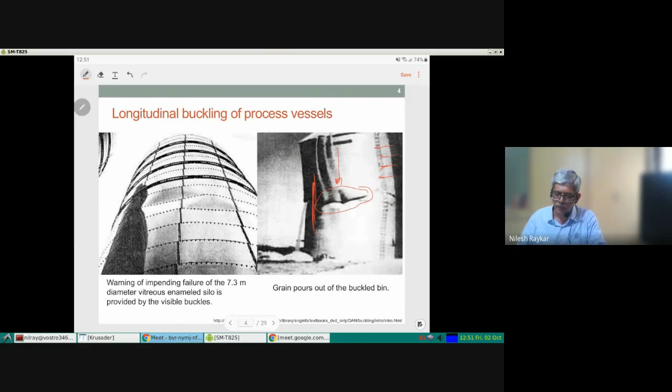For buckling failure, again there are 3 ways, but as usual we'll look only into the elastic approach.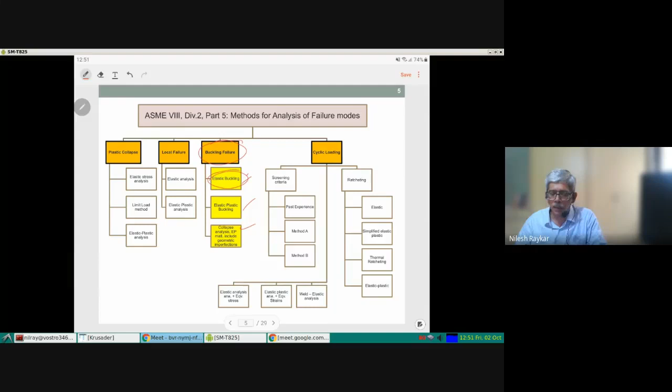So I will directly go into an example without going into detail. Let's say I want to analyze a cylindrical vessel which has some end caps and some kind of support, and I want to find what is the buckling pressure for this vessel using finite element method. I want to highlight the finite element related aspects in this case.

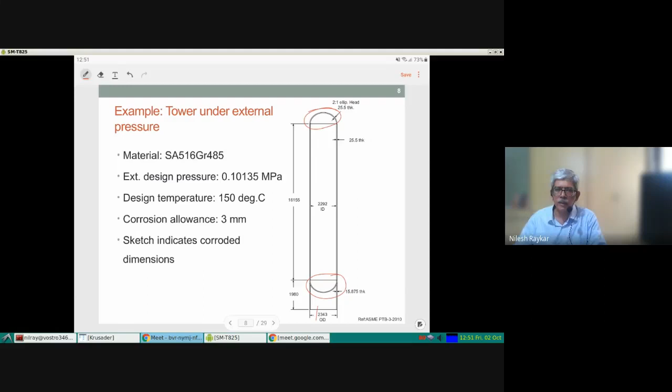I will not go into details of this. We will be modeling the vessel, you can model it using 3D elements as well. In today's machines, in 2020, you can easily model with 3D elements, but even if your machine can handle it, it will still take a few hours to solve the buckling problem for this geometry. Earlier, it was simply impossible to do with 3D analysis. Even today, it takes a huge amount of time and disk space to solve this problem.

So instead of using 3D brick elements like earlier, we will be using shell elements. What you see here are surface elements, or shell elements, which are elements having thickness defined for them. So you can have 1D, 2D, and 3D elements. These are 3D in the sense they are geometric, but they don't have a thickness component associated like brick elements. I have modeled the entire geometry here; unlike before, symmetry is not possible here because the buckling shape may not be symmetric.

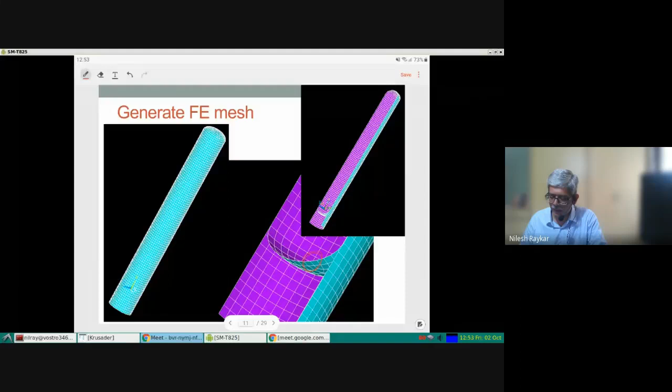After this, there are 3 steps in which the buckling analysis needs to be done. We need not go into details, I'm not trying to teach how to do buckling analysis, we'll just see what steps are included. The first step is static analysis, where you apply the external pressure load as it is and take a run - that is known as a pre-stress run. After that, you do what is known as an eigen buckling run.

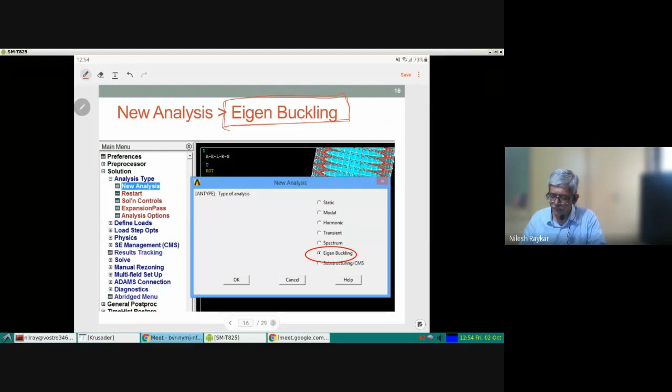These are the terms as defined in ANSYS; different software can have different names for these. Once you've done the eigen buckling, for the kind of pre-stress you are giving - which depends on the type of load applied, in this case pressure - the software calculates what kind of buckling modes can occur. The actual buckling modes are then defined in the third step, known as the expansion pass. This gives, in terms of whatever pre-stress you gave, how many multiples of that pre-stress would cause buckling - that is the final result.

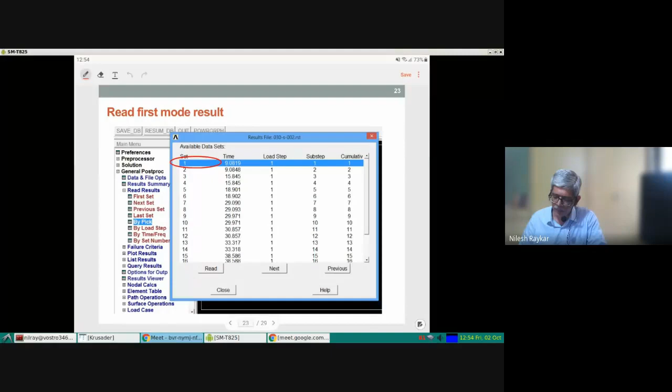The final result will be available in terms of what is defined here as time and frequency - these are known as eigenvalue solutions for this problem. Because this is a cylinder, it has 2 perpendicular planes in which the same solution will exist, so the first 2 eigenvalues are identical, the next 2 are identical, and so on.

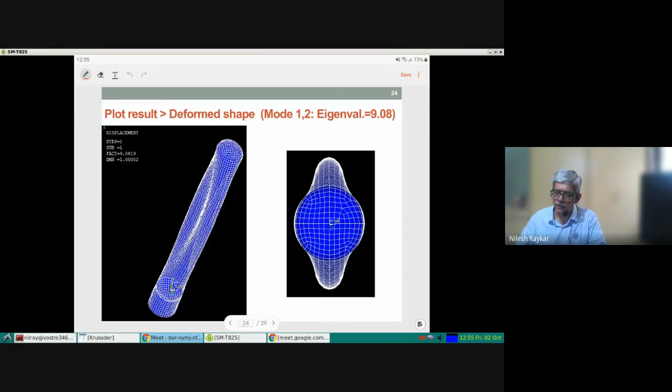The first buckling mode is the one we are interested in, having the lowest multiplier factor. To check whether the results are correct, we look at the buckling modes. The buckling modes for cylindrical shapes are characterized by lobes, as seen in the previous picture. The first mode will have 2 lobes, the second mode will have 3 symmetric lobes, and the next mode will have 6 lobes. That's how this structure buckles, depending on support conditions and geometry.

Instead of a cylinder, if you have a cone, you'll get a different type of mode shape. The higher mode shapes are not required; they're only for information purposes, or to check whether your model is behaving properly. But the first mode is the one which is critical - based on the first mode, we know how much is the buckling pressure.

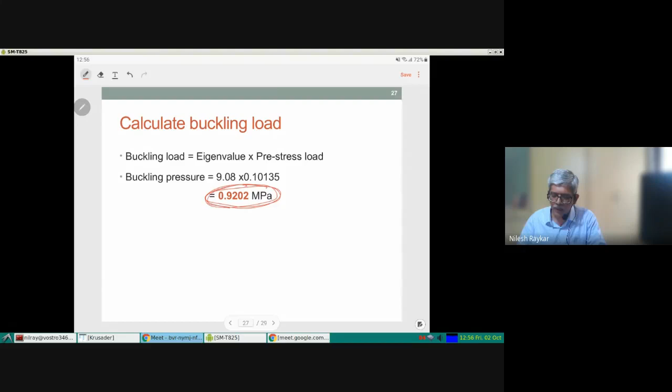This finite element analysis predicts that buckling will occur under 0.92 MPa pressure. There's another check using code-prescribed factors, which states that the buckling pressure for this particular geometry and loading case should be more than 0.253 MPa. Once this condition is met, the buckling is satisfactory. In our case, that condition is satisfied, so we say the buckling mode of failure is satisfied.

So I covered 3 of the primary checks. Let's look at the last check, that is the fatigue loading.

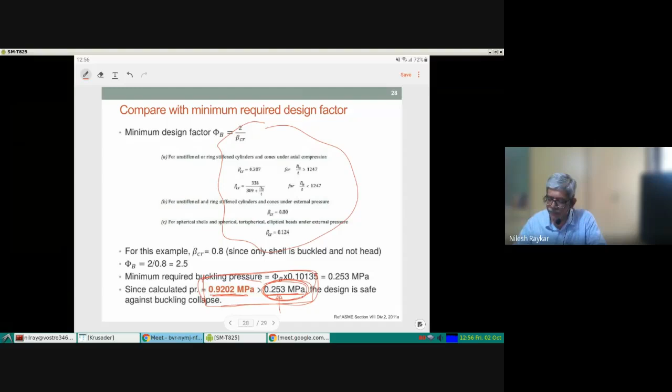Okay, in the fatigue analysis, there are multiple types. The first part is the filtering, which establishes whether fatigue analysis is required. We will now look at what is known as elastic fatigue analysis.

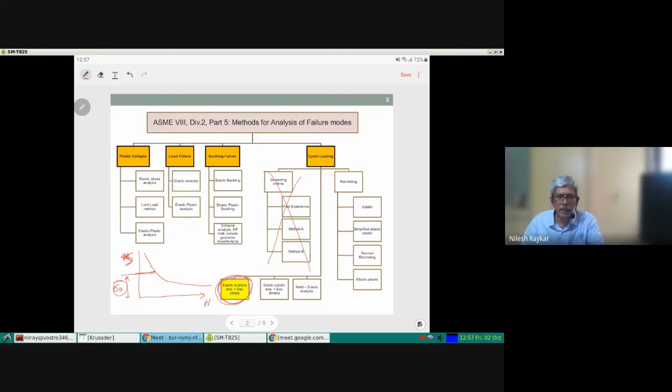In elastic fatigue analysis, the approach is that for your material, you have the SN curve available, which is used for the fatigue design. So you find out what is the equivalent stress amplitude, sigma A, at every point of your vessel. Look at the point having the highest stress amplitude under cyclic loading, and calculate the life for your material. That is given by the formula. The entire procedure revolves around how to find this sigma A.

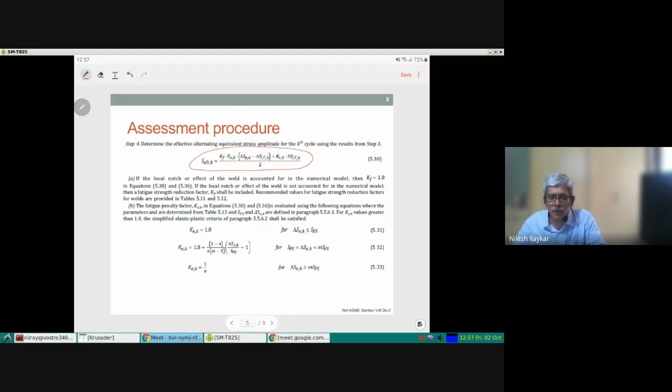I will not go into details of how to find that, it's not necessary for this session. Just to give an idea of the number of factors involved, the equivalent or alternating stress amplitude is given by a formula involving many factors. These relate to conditions such as the type of welding, whether it is near the weld, what is the surface finish of the weld, what materials are joined, and so on. If temperature stresses are involved, you have to give separate status to thermal stresses. Having done that, you ultimately obtain the stress.

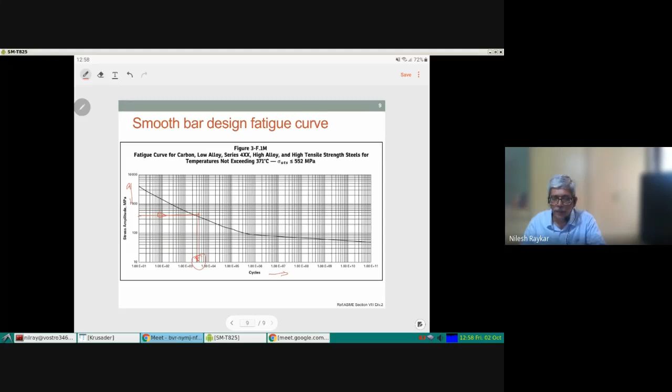If you have multiple cycles in your vessel, then you apply Miner's damage law. For cycle number 1, if your analysis shows it can take n1 number of cycles and the actual cycles are smaller, the damage caused by that cycle is given by actual cycles divided by possible cycles. Similarly for the second cycle, and this entire sum should be less than 1. That is how fatigue design under multiple loading situations works.

That covers the four branches of analysis. To summarize, for process equipment involving vessels of different shapes subjected to different types of loadings and materials, four primary checks need to be done. One is the plastic collapse check, which involves stress categorization as one of the options. There are other options available which we did not see.